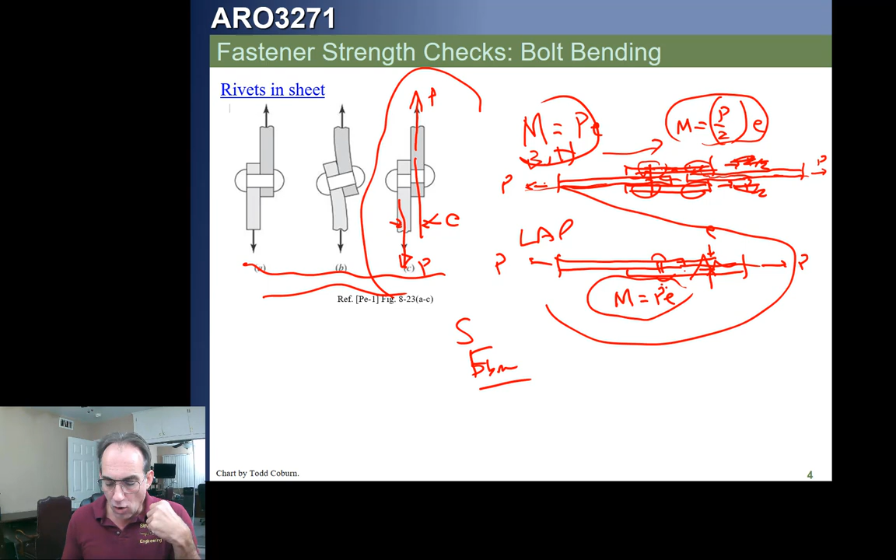Now normally if the sheet thicknesses are relatively thin, we ignore this. The reason we're able to get away with ignoring it is because if we test our joints using the same approach and ignore the moment when we test, then the shear and bearing allowables we develop already account for whatever small moment occurs. This means as long as our sheet thicknesses are in the range provided, you'll notice in your handbook, in the allowable section, that our bearing allowables have different values for different size sheets.

With different size sheets, the thicker the sheet is, it causes a slight change in material properties. But also, if those bearing allowables are from testing samples in those thicknesses, then the bearing values shown in our handbook already account for these small eccentricities. This is why we can ignore the moment that develops due to the eccentricity, because already the shear and bearing allowables in our handbook account for those.

Now the problem occurs if we start attaching thick parts together. If these are outside the ranges those bearing allowables were developed for, then that eccentricity may no longer be insignificant—it may not be reflected. Like when we have a big aluminum ring attaching to a thick composite sandwich with splice plates like this, we end up with eccentricities and secondary moments which may need to be addressed.

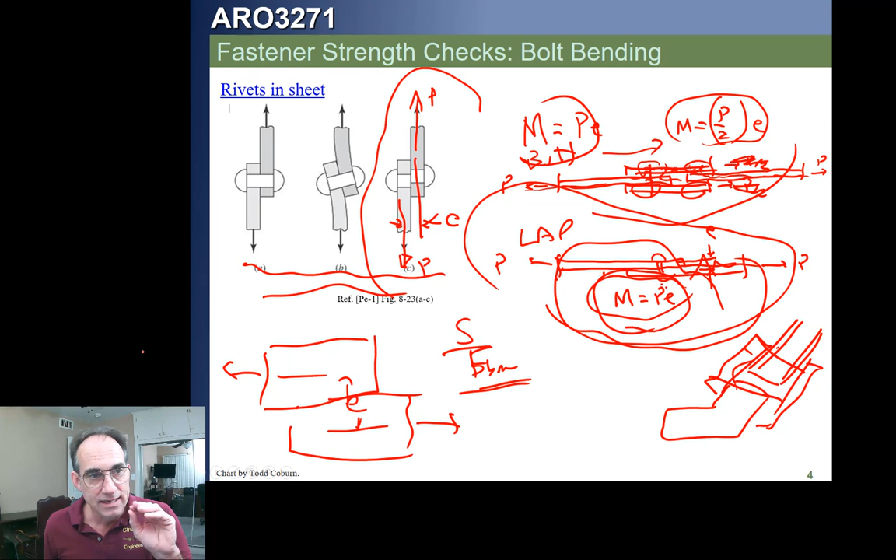So what we're going to do here—even though we typically will ignore bending moments in aerospace analysis, that really is only valid when the sheet thicknesses are relatively thin. If our thicknesses get thicker, like for many rocket parts or larger, beefier parts, then we actually need to be able to analyze the moment that occurs.

As soon as we start analyzing the moment that occurs, we get into some rather challenging detailed work, looking at prying effects on the head and things like this. We're not going to try and learn that in this undergraduate class. All we're going to focus on is analyzing what moment springs into being and how that's analyzed in this particular class. We're still going to ignore the moment unless we have a joint where we're asked to assess it, or it's obviously thick.

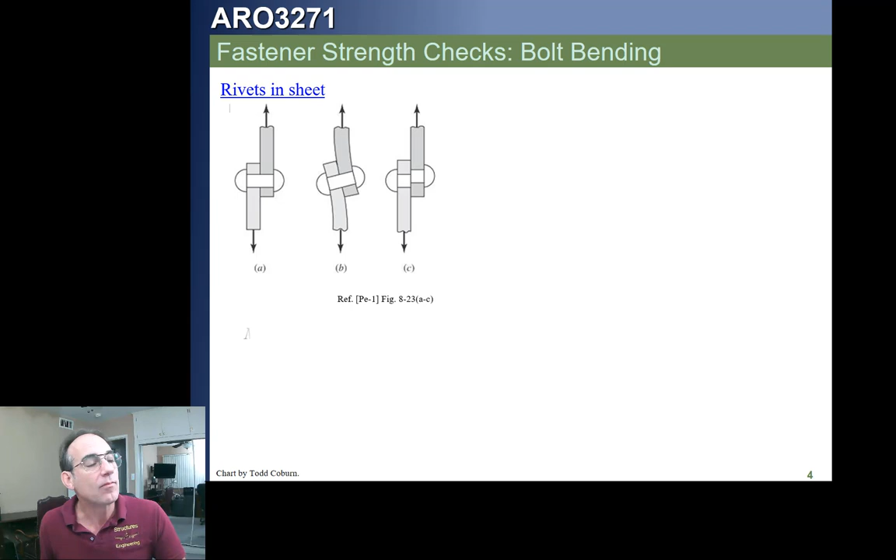So for a lap splice like this, you can see this eccentricity is going to just be half the thickness of each plate: T1 over 2 plus T2 over 2, which is given by this little equation here.

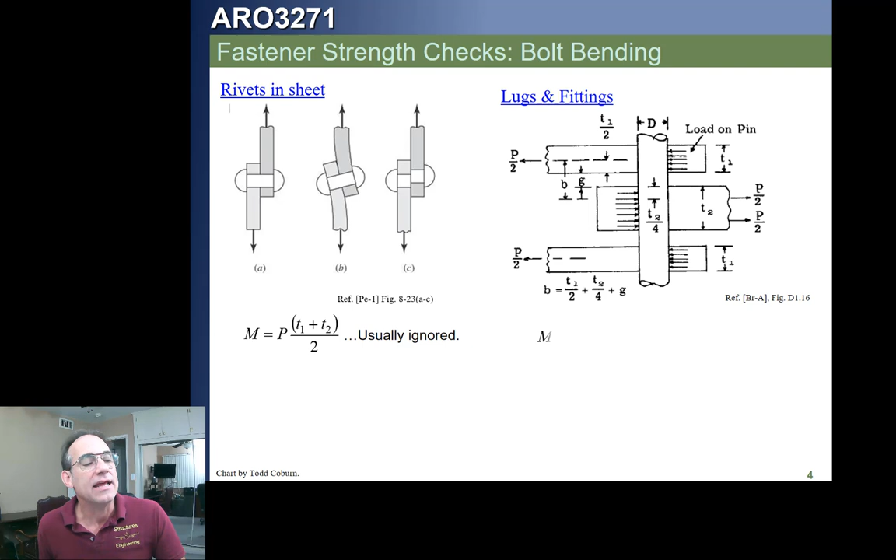If we have a lug, which is a special name for certain kinds of joints, you can see this is a double shear joint. We've got P here, shown as P over 2 for each half. Imagine this thing cut in half: if this is P, half goes up through this part and half goes down through this part. So Bruhn's picture shows we get half of that on each side. This first P over 2 is centered at the middle of this.

In this particular case, our eccentricity is half of this thickness, which is T1 over 2. And we've got half of this thickness, T2 over 2. Actually, this is half of the half, so this is T2 over 4. Then we have whatever gap exists, which adds to our total eccentricity. If we call the gap T over 4, plus the gap, plus T over 2 — and look at this, T1 is this little skinny guy, and this guy down here is T2.

Let me do that again. Let's say we have a joint like this, a thick joint, with a gap. First we imagine the gap all occurs at one side. If this is P, then this is P over 2, and this is P over 2. Now we've got this gap here. Let's draw this bigger: we've got this little piece, this piece, and this piece down here. We've cheated with this gap all the way over to one side.

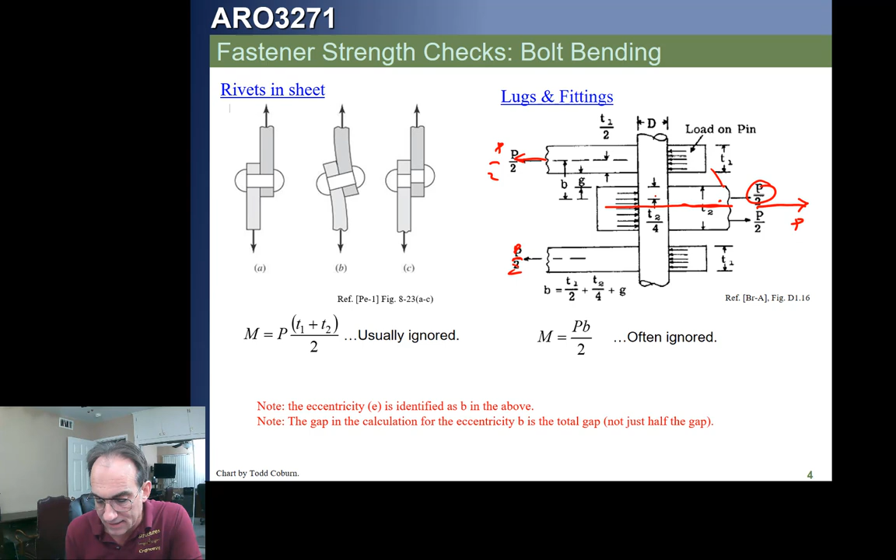Let's look at it again. Let's say we've got a force here, P, transferring to right here, P over 2, and right here, P over 2. Imagine half of this force goes this way, basically centered on one half. This is one half of this thickness, and it's centered at 1/4 of the thickness, so this dimension here is T2 over 4. Then we've got the gap, and this dimension here, which is T1 over 2. This gives us this equation for the total eccentricity.

We're using E rather than B for eccentricity. Our moment then is the force that's transferring this way, which in our case is P over 2, multiplied by the eccentricity. This gives us the total moment in that joint.

Now, going the other way down to this one, since we cheated all the gap to one side, there's no gap down here. So the eccentricity there below is just going to be T1 over 2 plus T2 over 4. There's no gap there. That moment will be P over 2 times that E below. It's less, therefore we generally won't even check it.

We're only going to imagine all the gap is on one side and check that spot. Once we have that moment, we can check the plate for that moment, or more specifically, we can just imagine that the fastener is carrying a pure moment, and that's a gross simplification, but then we'll just take the cross-sectional area of the bolt shank, and we will analyze it for the bending MC over I, where we have the M using that moment and the I of that bolt and the radius of the bolt, or D over 2 of the bolt. See how that works?

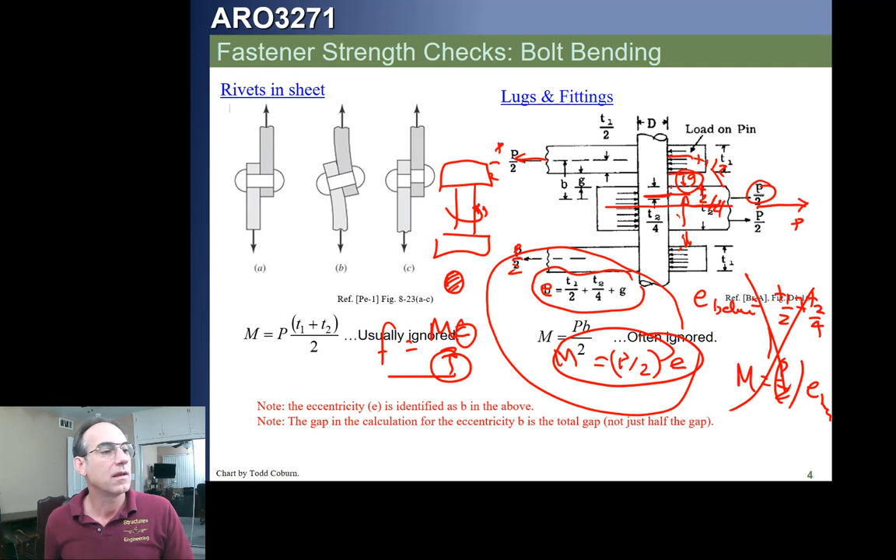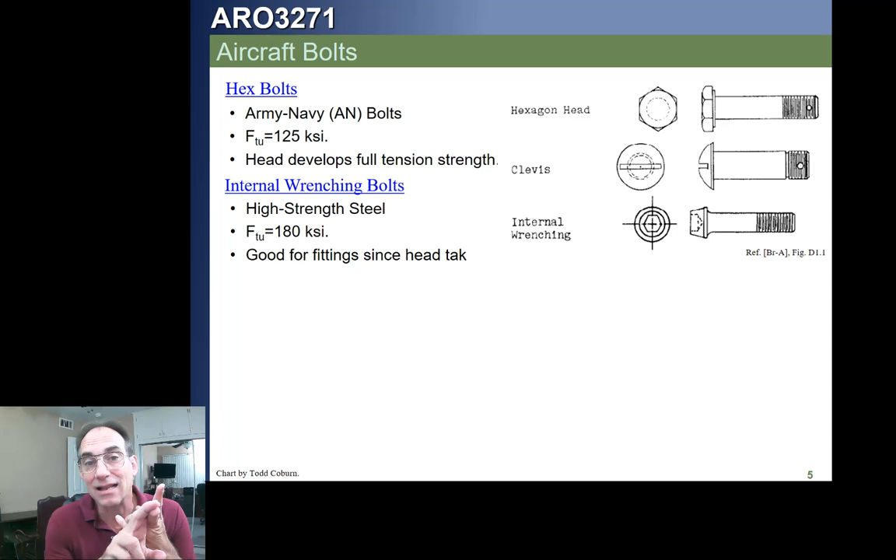Now, next we'll look at some aerospace standards. So for bolts in aerospace, we're going to be seeing a lot of rivets. We're going to use a good amount of Hi-Loks and lock bolts, and then we're going to use some threaded fasteners. Threaded fasteners, we have to take extra care that they don't come unthreaded in flight. There's 3 major standards that we're going to analyze for threaded bolts, and then we're going to look at how to combine loading on aerospace bolts.

And the combination of loading for the threaded fasteners used in aerospace will be the same as we will use for non-aerospace fasteners. So last time we looked at aerospace and non-aerospace standards, but today's study on how to interact our loads on the bolt to calculate the net effect for the margin of safety is going to use the same approach as what we're going to look at here.

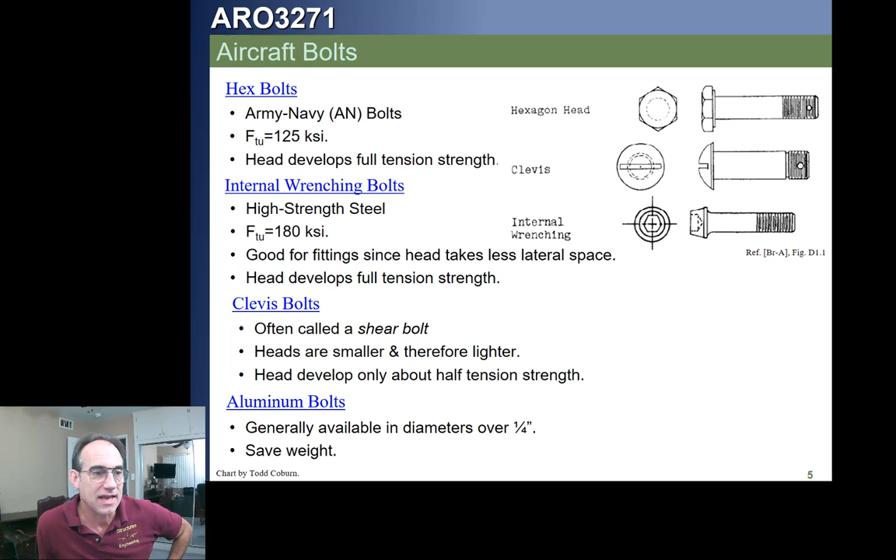So there are various bolts. We're going to basically break our bolts into a few major classifications. Let's take a look at that on the next slide.

Okay, the first kind of bolt we're going to look at is an Army-Navy steel bolt, an AN steel bolt. This table here gives us the allowable based on the diameter. Now, based on these nominal diameters, you can calculate the shank area, but it's provided here for you if you want to use that. Then we see 3 allowables. Notice these are not stress allowables like we normally see. These are force and moment allowables. We need to be a little bit careful because often when we're talking about bolts, sometimes we'll talk stresses, often we'll talk forces.

So these are the allowable forces, or the ultimate allowables. S sub U is the ultimate shear allowable, that's how much shear force the bolt can take. P sub U is the tension allowable, that's how much tension force the bolt can take. And the moment, M sub U, is the max moment it can take.

For example, let's say that we have a 1/4 inch bolt. If we have a 1/4 inch bolt loaded in tension, we look and see we got a 1/4 inch bolt, we know that our allowable is this. If we have a tension load of 2,000 pounds, we can write the margin of safety directly. If instead we have a 7/16 bolt loaded in shear, let's say 8,000 pounds of shear, we can just write the margin of safety based on that allowable.

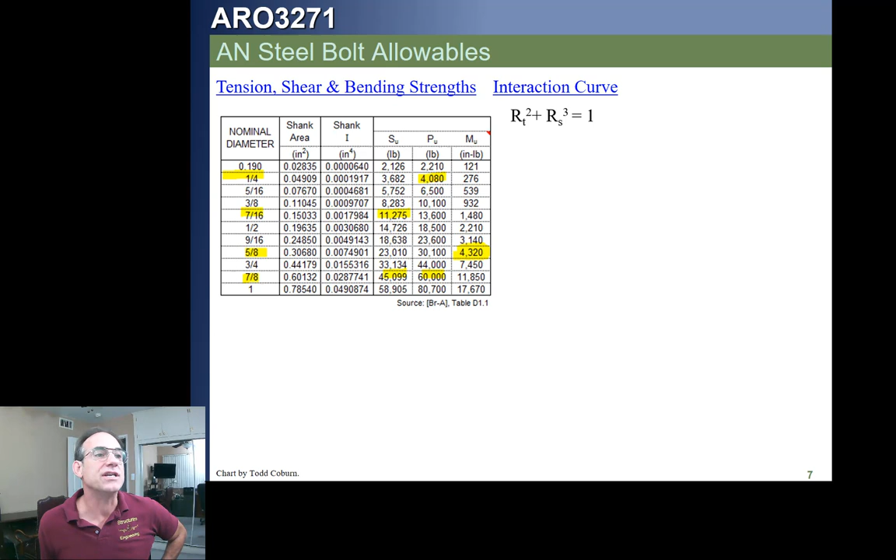If instead we have a bolt that has shear and tension, these are the two allowables, we then are going to have to use this interaction equation. Since we have shear and tension, we're going to have to write the stress ratio for both.

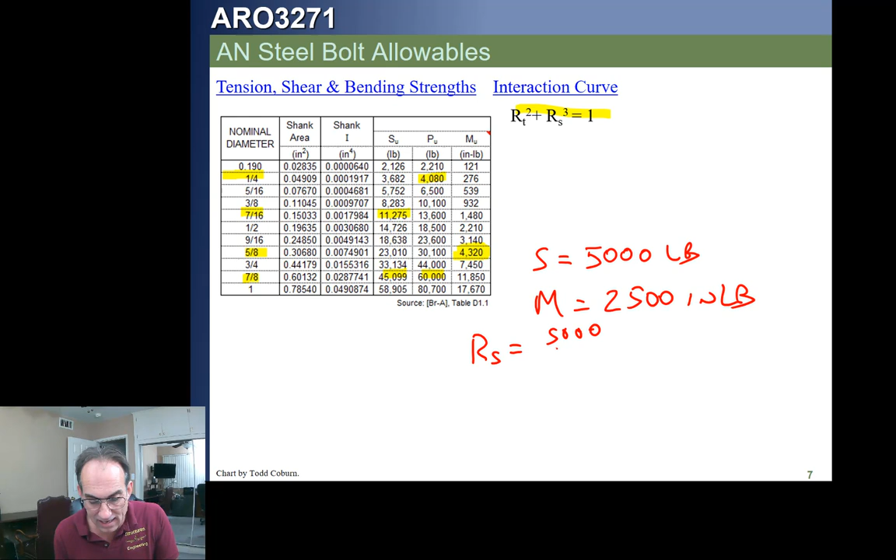Let's say that on this 7/8 bolt, the shear force is 5,000 pounds, and the moment is 2,500 inch-pounds. Our stress ratio for shear is just going to be 5,000 divided by the allowable 45,099. The stress ratio for tension, or excuse me, the moment affects our tension stress, so that is going to be our moment, 2,500 over 11,850.

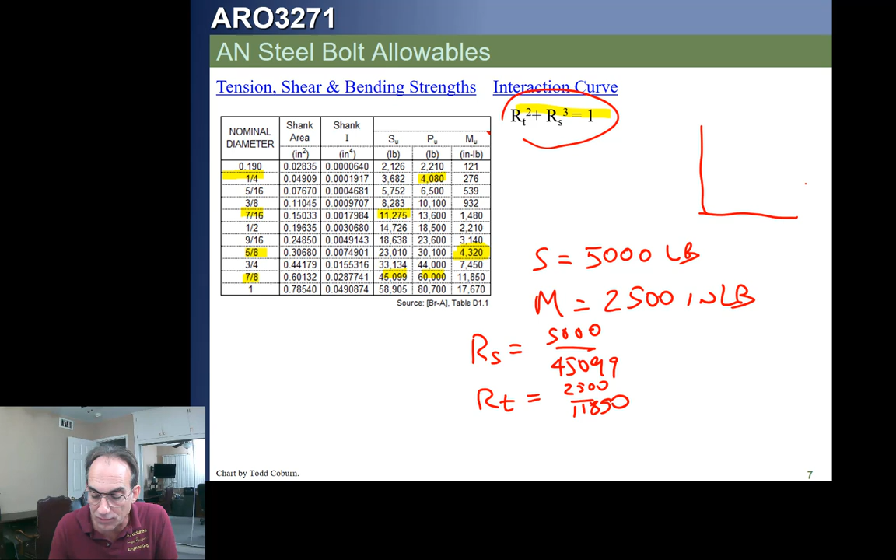In that case, we now have to apply this interaction equation. Now, we don't have a closed form equation, so we're going to have to go to the interaction curve for threaded fasteners, which looks something like this. We'll look at that on the next slide. This is going to have RS down here and RT down here. We're going to plot our point, draw a line, and write the margin of safety as we learned to do in ARO3261.

Let's say instead that we have a 1-inch bolt. Let's say that 1-inch bolt has an axial force of 30 kips, a shear force of 20 kips, and a moment of 5,000 inch-pounds. We're going to first write our stress ratio for tension.

Now remember, tension stress is P over A plus MC over I, right? So actually we can write that tension stress ratio as the ratio of both. So we've got the axial one, 30K over, that was axial, so our allowable is 80.700, plus we've got the moment one, which was 5K divided by 17.670 inch kips. That's our total stress ratio for tension.

Then we get our stress ratio for shear, which we said we have 20 kips, and our allowable is 58.905 kips. Now we've got our two stress ratios. The tension stress ratio combines axial and moment. The shear stress ratio is just the shear. We're going to take those two stress ratios, plot them on our curve, and write our margin of safety. The interaction curve is on the next slide, or in a moment we'll take a look at that, okay? That's how we do that.

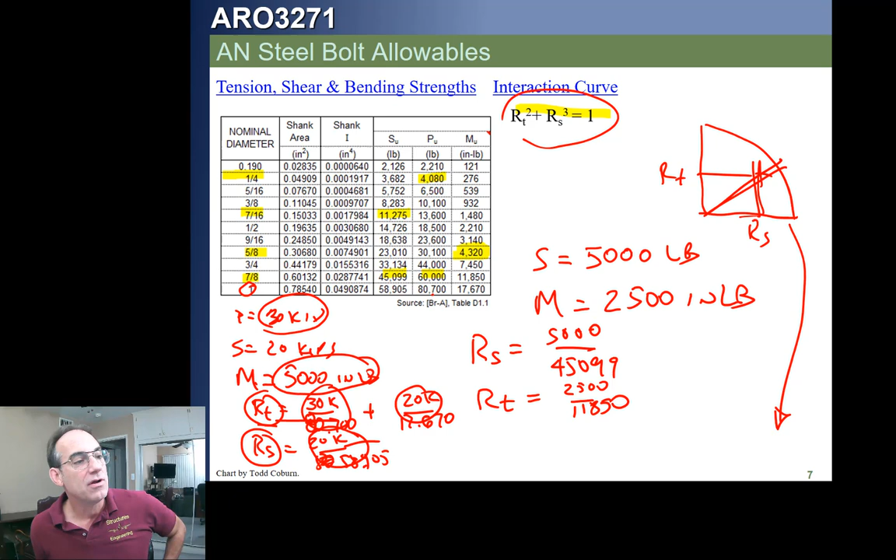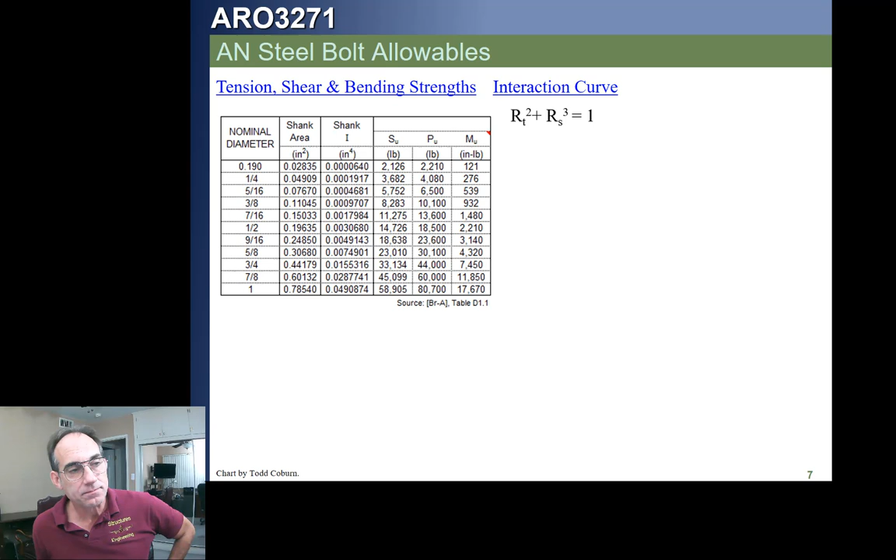If we ever have a combination, if we have axial and moment, we can once again just add those two stress ratios and write the margin of safety directly. But if we have shear with either axial or moment or both, then we're going to have to write both stress ratios and use the interaction curve. And the same approach will be used for all threaded fasteners. The difference is that we will have different allowables. Okay, so this is how we combine them.

This first equation is showing if we just have tension and shear, we can combine like this. If we have tension and bending, you just add those together, write the equation like this. We don't actually need to write the equation. All we're going to do is calculate our stress ratios.

Once we have the stress ratios, we'll take the shear stress ratio on this axis, plot it against the tension stress ratio or the normal stress ratio. We're going to draw a line from the origin through that point and then write the margin of safety as we learned to do in ARO3261. Got that? If you don't remember how to do that, pull up your ARO3261 handbook and review.

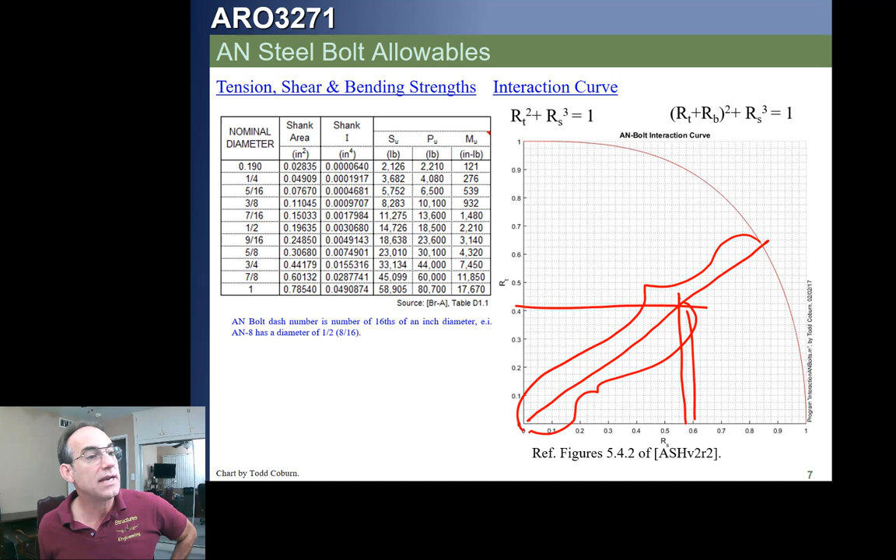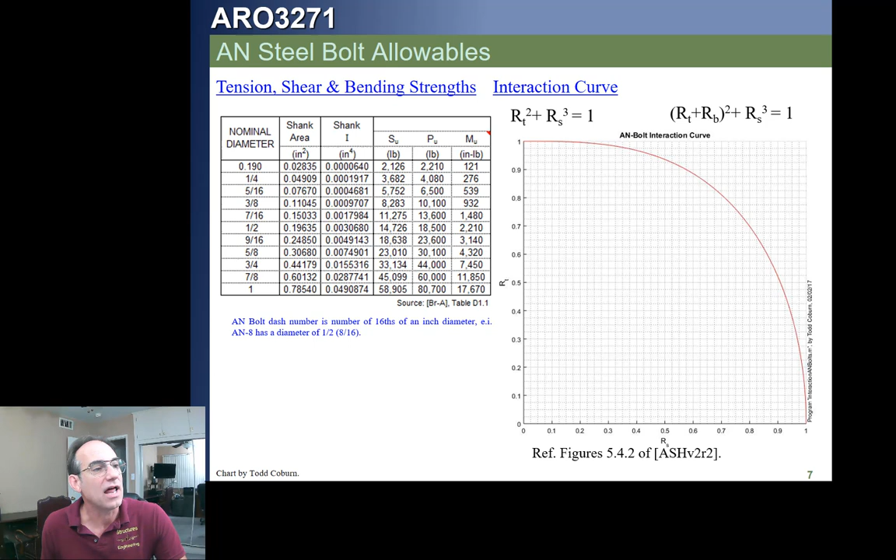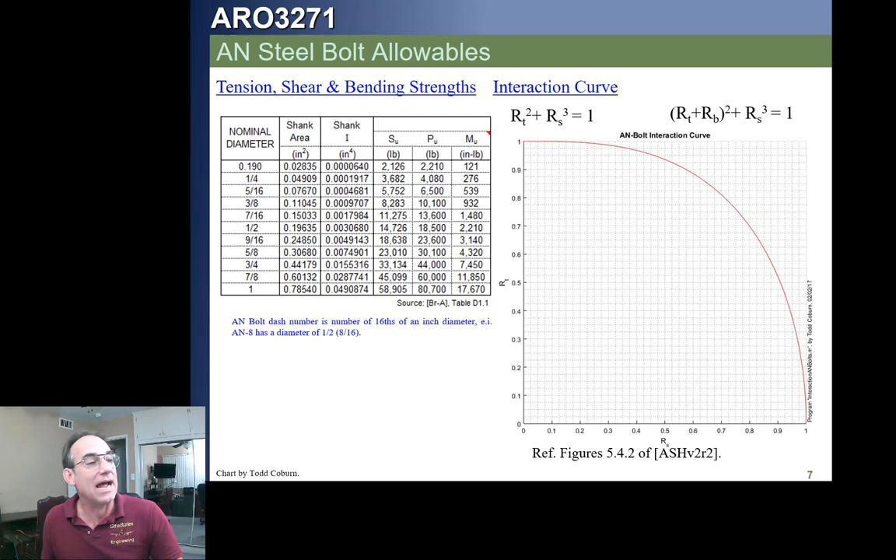Okay, one more deal. These AN bolts, a lot of times they're called out as a dash number, like AN 8 and such. That 8 or whatever is the number of sixteenths. So 8/16 would be a half-inch bolt and so on. So Bruhn has some, calls these out with using their dash numbers. Sometimes I will do the same thing. If that happens, that's how you convert that.

All right, the next kind of bolt is an internal wrenching bolt, a steel internal wrenching bolt. Steel internal wrenching bolts have the same interaction curve as we saw.

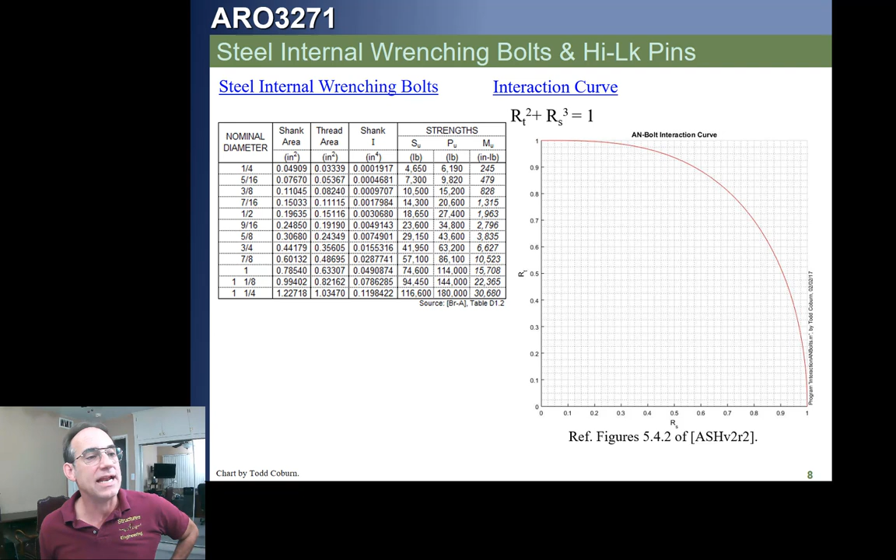In fact, all threaded fasteners have the same interaction curve. It says here it's an AN bolt interaction curve, but really it's for all threaded fasteners. You can see from our table here that we have a shear, moment, and axial load allowable. We're going to handle these the exact same way.

If we have a 2024 aluminum bolt, we have the same threaded fastener interaction curve, but you'll notice we have different allowables. Now what this is providing is not stress, this is again force allowables. For a 35 KSI shear bolt, 62 KSI axial stress, these are the force allowables. So this is the shear allowable in pounds, the axial allowable in pounds, and the bending allowable in inch pounds for those, okay?

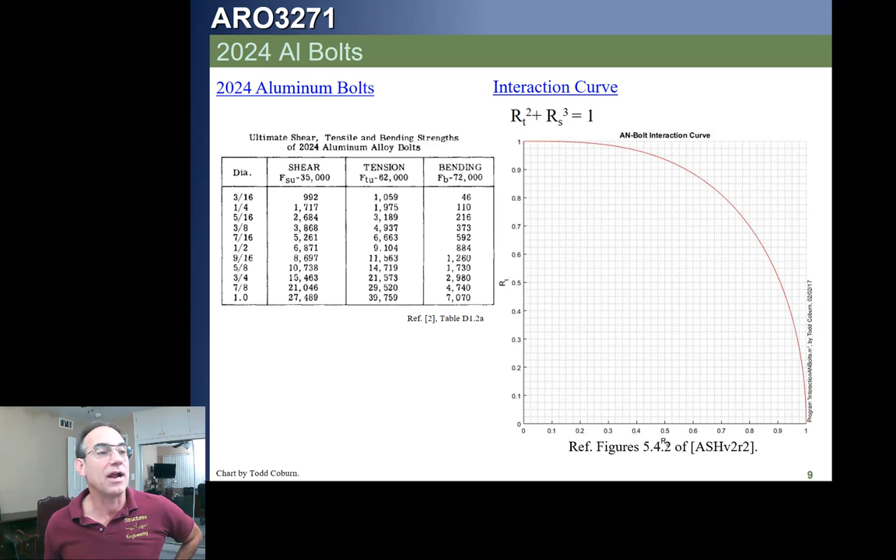And we're going to use the same interaction curve. So that is how we handle threaded fasteners. If we have a non-aerospace bolt, we will take the allowables from last lecture, write stress ratios in the same way, and use the same threaded fastener interaction equation to combine those stresses, okay?

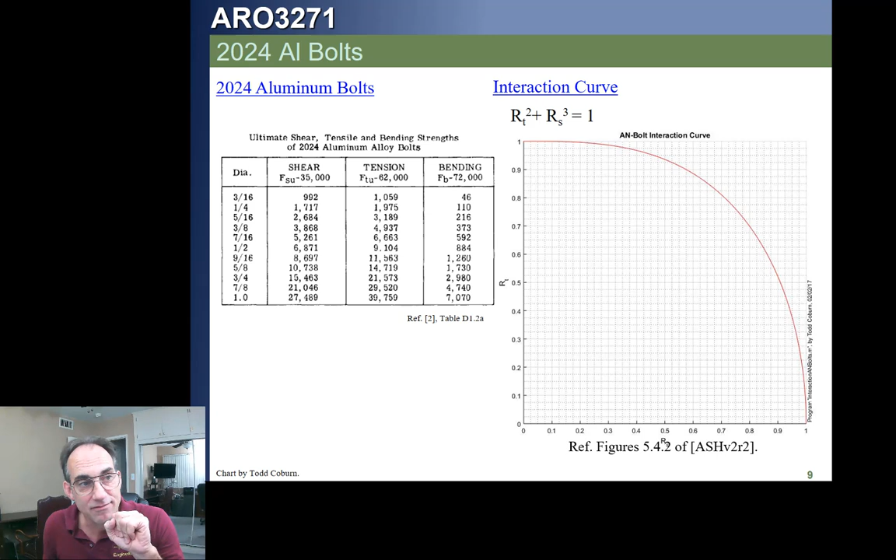Next, we're going to look at a different kind of fastener. These are lock bolts. Lock bolts are very commonly used in aerospace. They're permanent fasteners - basically a fastener that's designed to be put in place, and when you apply the collar, it breaks off the back end, so you have a permanent collar on it. In order to remove these, you have to drill them out. It's a big hassle, but they're done a lot.

I've got a number of links in the PowerPoint. I'm going to encourage you to pull up those links and watch these videos. It really helps to understand the way these lock bolts work.

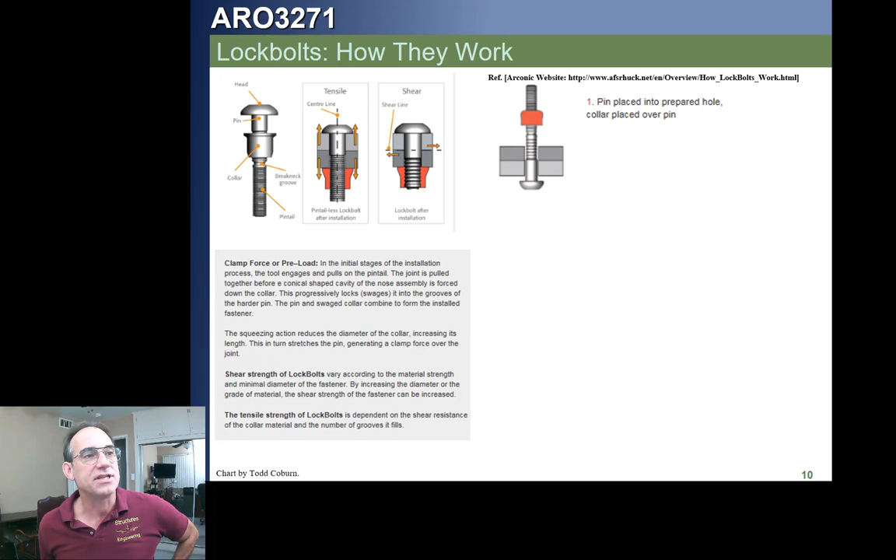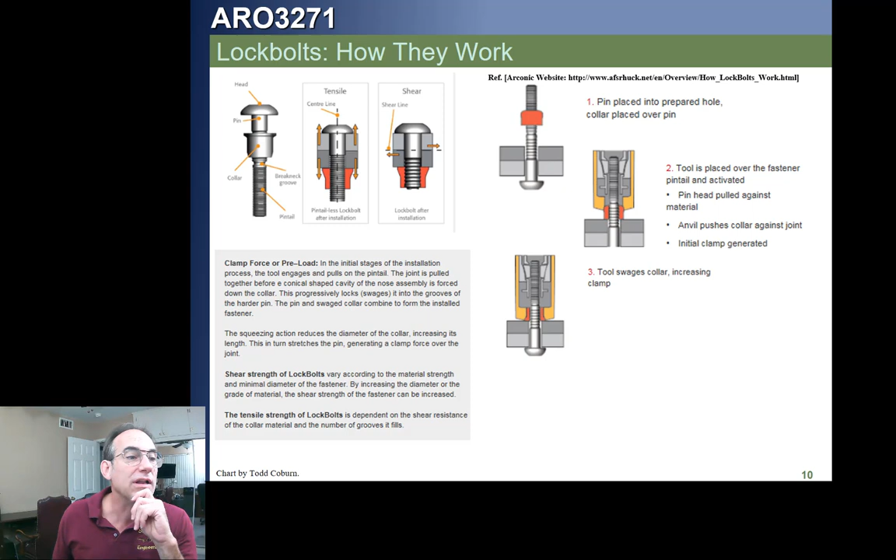This is a synopsis: you put the fastener in, you put the collar on, you then apply a tool which presses that collar on. As it does, it squeezes the collar down onto the threads. If the threads are like this, it squeezes the collar until it deforms the material into the threads. The videos show this really well, and until it breaks off.

This video right here, these two videos I recommend watching. Watch it, then stop it and go slowly through as you see how that tool presses the material, takes the material and deforms it and jams it down into the grooves of the pin. That's how these things work.

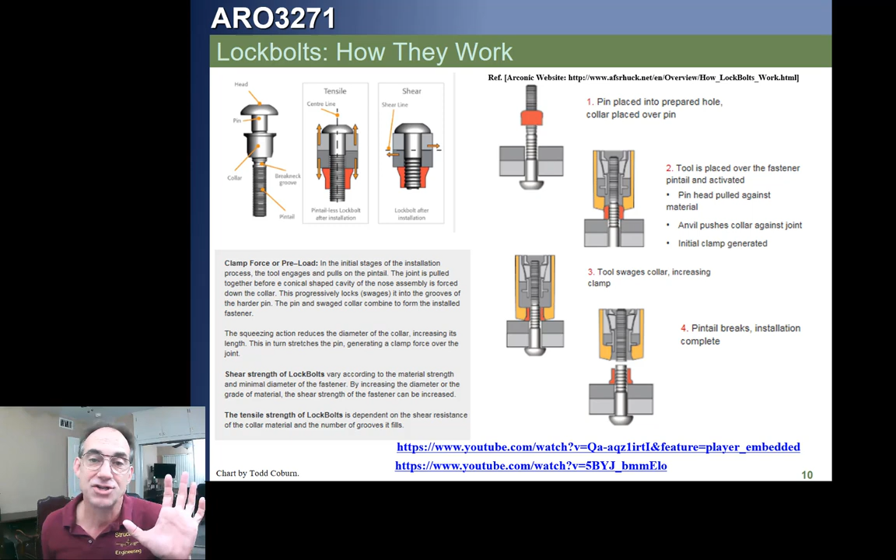Now, that's just to help you understanding. What we're going to do is analyze these. So what we need are the allowables. These are the allowables here.

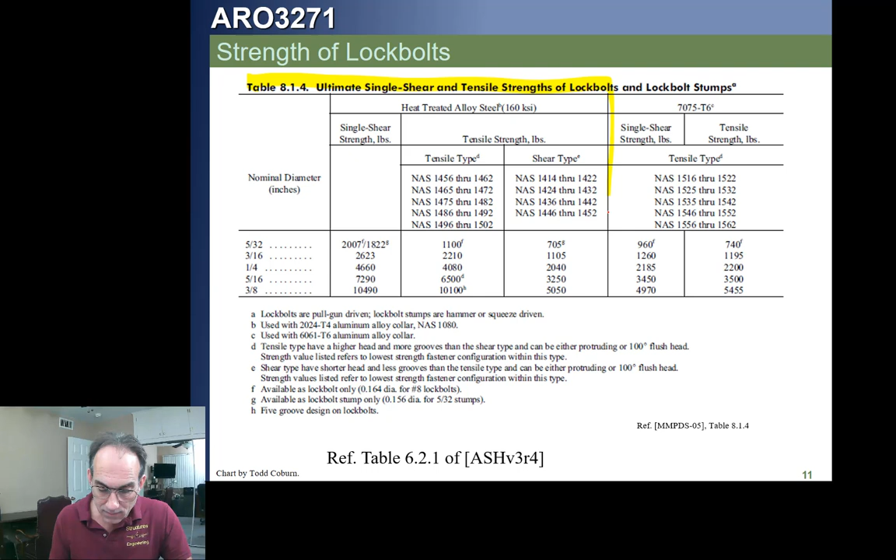Now, this little table is a little confusing unless you pay attention, and I have found that students often don't pay that much attention, so that means it might hamstring you also. This is really kind of two tables. We have this table - this is for steel fasteners, right? And we have another table, which is this one, which also has this part, okay?

So the first one is for steel. If we have a steel fastener, we're going to go to this first part of the table. If we have an aluminum fastener, we go to the second part.

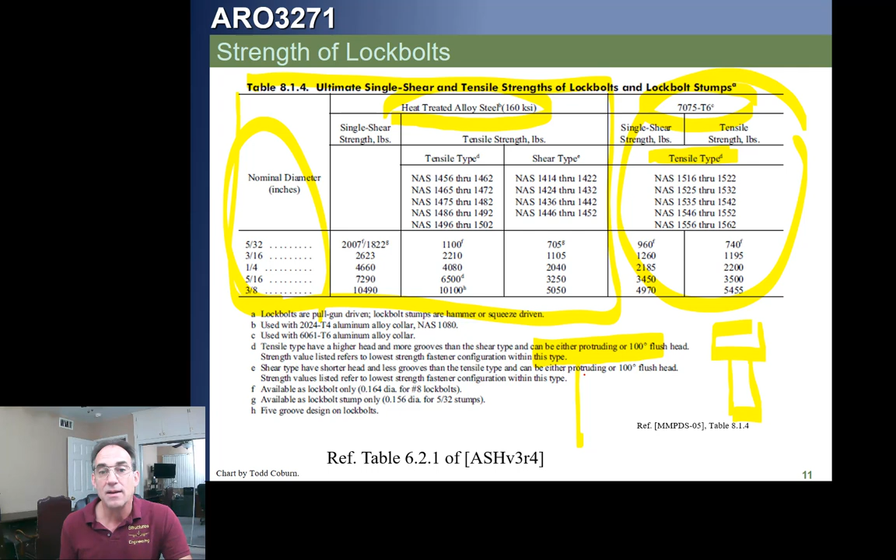Now, the easiest one is aluminum. You'll notice we only have aluminum allowables for tension style heads. Now, what happens is, if a fastener is designed for tension, it tends to have a deeper head. If it's designed for shear, it may have a really thin flat head. The thin flat head holds that fastener in place, but it doesn't give as much strength. That head can break off like we saw with the button back in 3261. So we need to be alert for tension and shear type fasteners.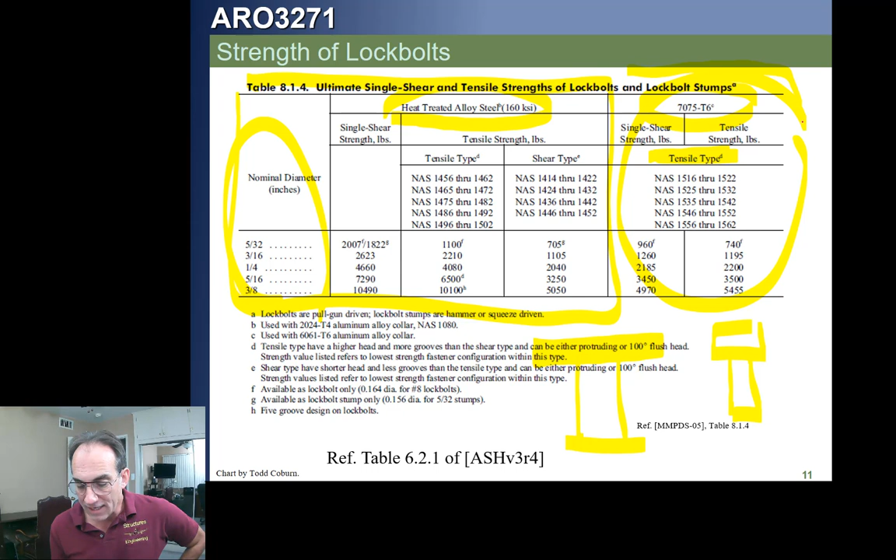Now you'll notice in this table for aluminum fasteners, lock bolts, all we have is a tension style head. So we're going to assume that any aluminum fastener has these allowables. You'll notice this first column is the shear allowable, and this second column is a tension allowable, okay?

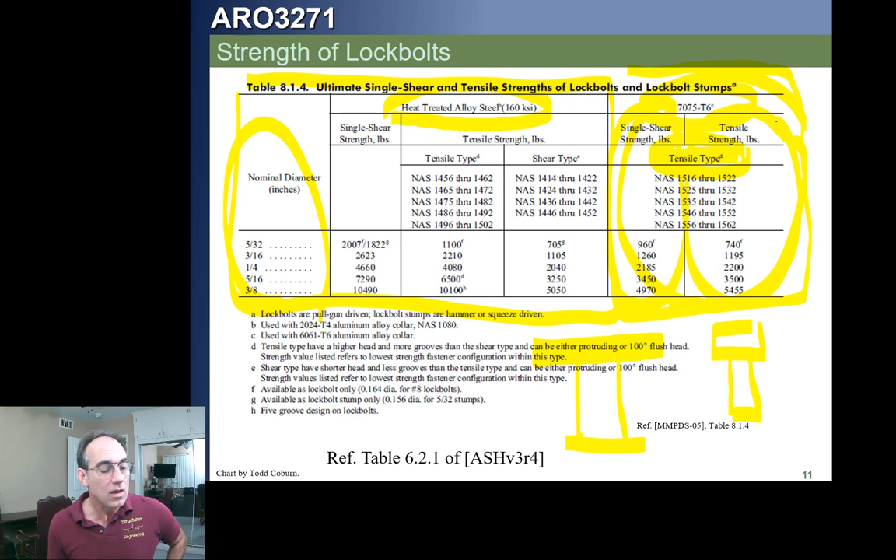Now, when we get to steel fasteners, we're going to use this other part of the table. Let me erase everything and start that over. We're using this part now. So we're going to say, oh, we have a steel fastener.

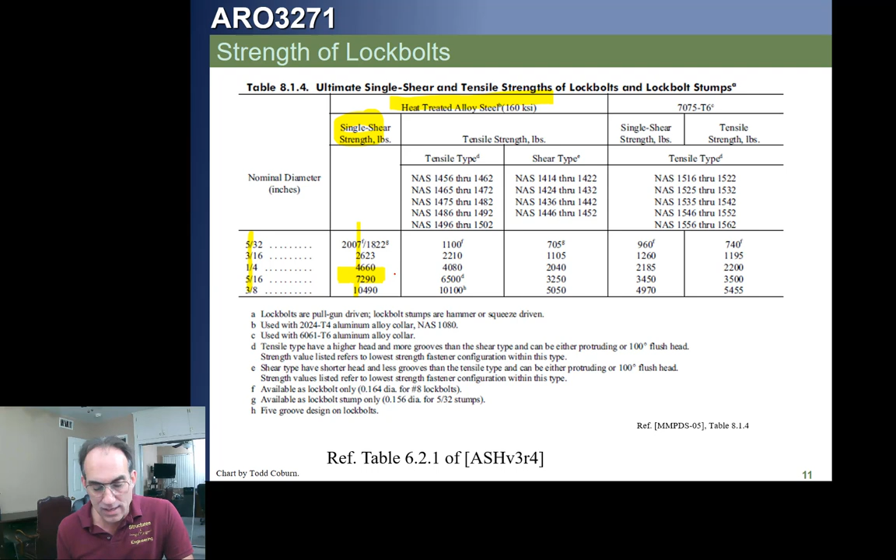That means we're over here, and that means we're going to take our diameter, and then we're going to be looking for an allowable. We're going to say, okay, if we need the shear strength, we're going to use this column. So a 5/16 fastener has a 7290 pound shear strength.

That same fastener, if we're looking for the tension strength, we're going to have to first determine, is it a tensile style head or a shear style head?

Once again, the head means that a shear head tends to be very flat, like this. If this bolt is in shear, you don't have to worry about this. But if it's in tension, you're going to tend to bend the head like this if it's very thin. A tension style head will tend to be thicker, so if it gets axial load, it has more shear and moment capability so that it can develop the full strength of the fastener.

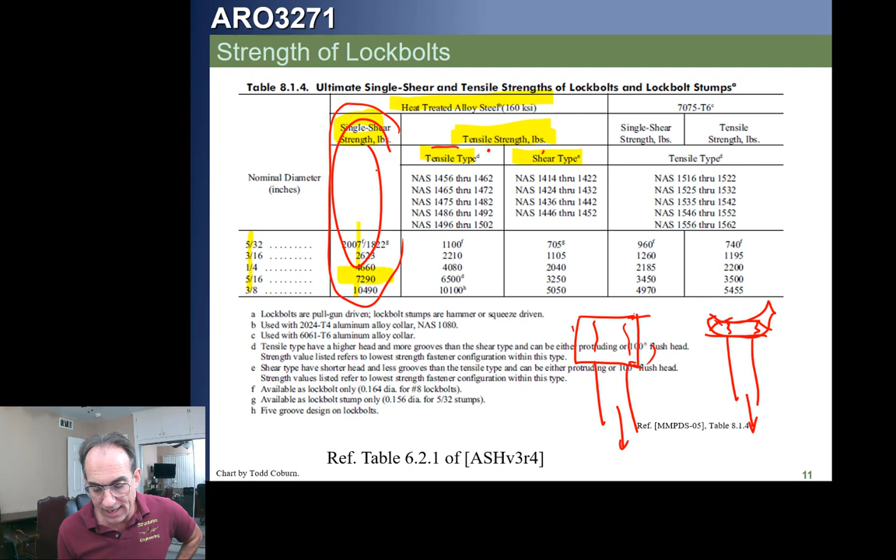So for steel fasteners, first we have to figure out the shear allowable, which will always be from this column over here. The tension allowable will be one of these two columns. You've got to say, do we have a tension style head or a shear style head? If it's a tension style head, this is our allowables. If it's a shear style head, these are our allowables, okay?

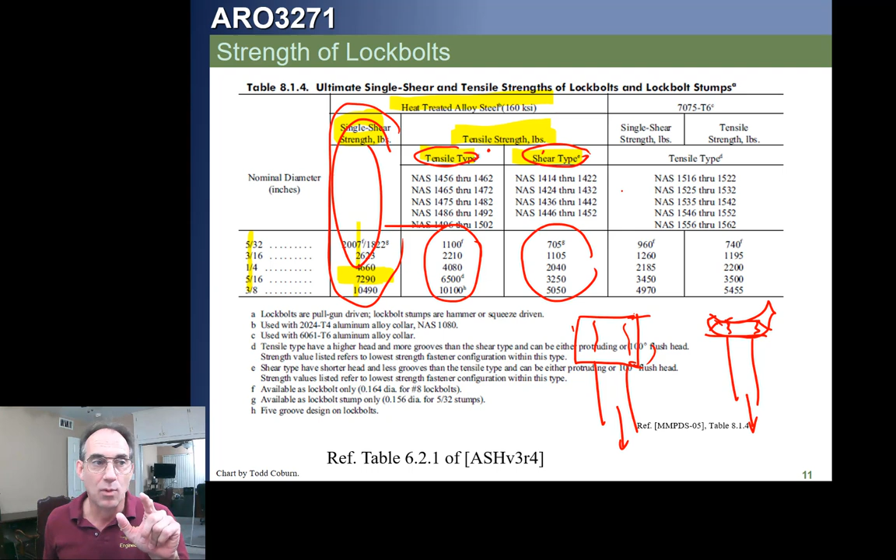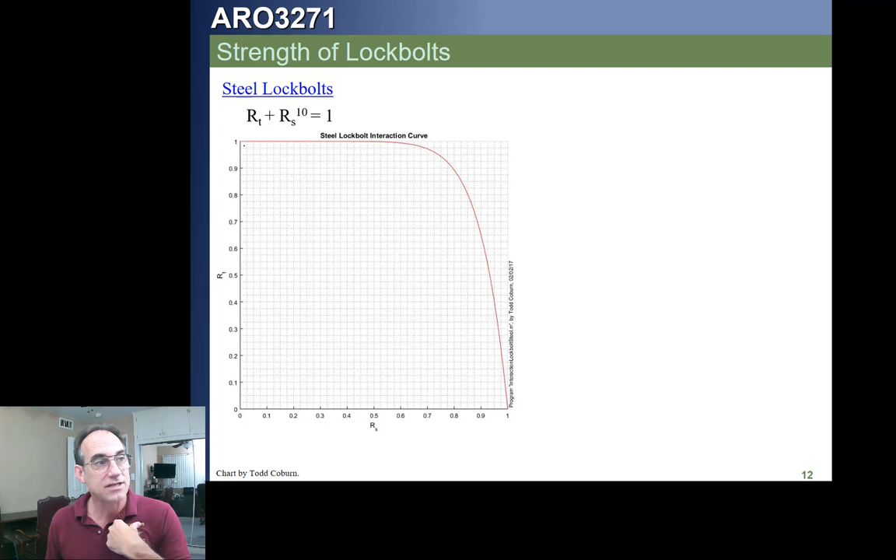That's important. Now, once we have understood that, we have a shear and a tension allowable. If a fastener takes both shear and tension, then we're going to use this interaction equation, which means we need this curve, which means we're going to write our stress ratios for the axial load and for the shear, and then we will plot our point and write our margin of safety using this interaction curve.

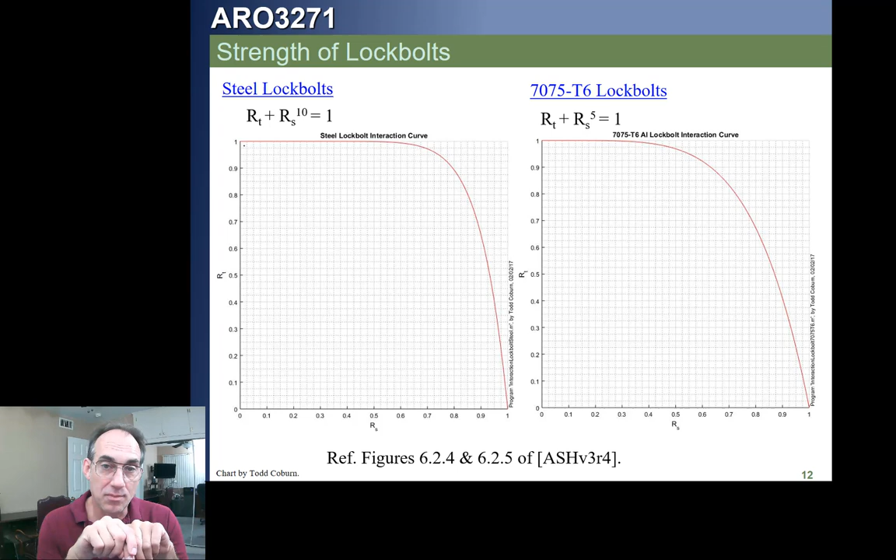If we have an aluminum lock bolt, then we need to use this interaction curve because it has a different interaction equation. So for threaded fasteners, we're going to use the interaction curve from the prior slides. If we have a lock bolt, we're going to use one of these two interaction curves with the allowables from the prior slide. Got it? That's how we're going to do that.

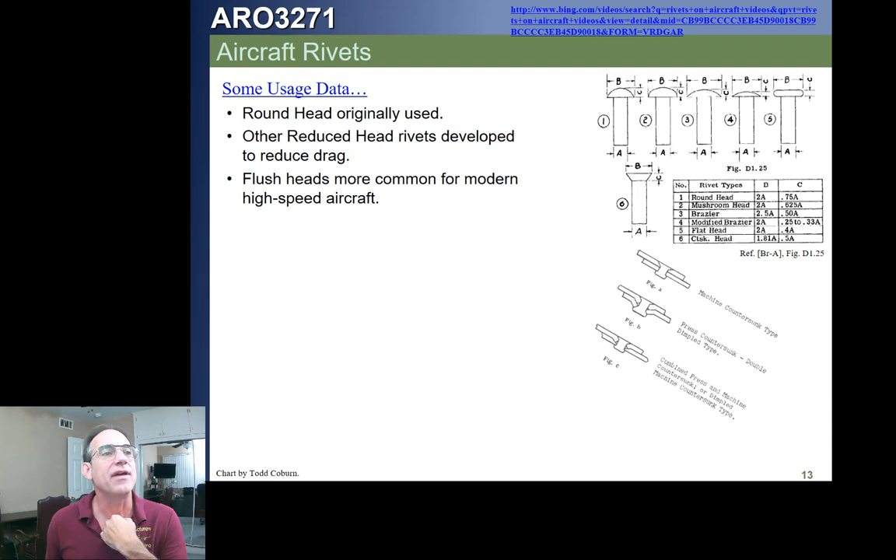We're going to be looking at three kinds of rivets: protruding head rivets when the head sticks out, and flush head rivets. With flush head rivets, we're going to have two types. One is called machine-countersunk, which means somebody came along and said, all right, we've got two sheets of material and we're going to fasten them together. First, they will drill the material like this, and then they will install a flush head fastener like that. That's called machine-countersunk because they machined this cut.

That develops one set of allowables. If we have a fastener that has a head that sticks out of the joint, like this one, that's called a protruding head. This is our first type. This is our second type.

The other type is dimpled, which is used when our sheets are really thin, so they're too thin to machine. What they will do is dimple it, which basically means they'll take that flush head rivet and use a tool on the sheet. We've got two sheets attached together here. They drill a hole through it, and then they apply a tool which bends the sheet into this form.

Sometimes they do this as they're installing the rivet. Then what they do is they apply this rivet, this flush head rivet. So now the rivet ends up—they didn't make the sheet thinner at all. It's just deformed at the place where it's joined.

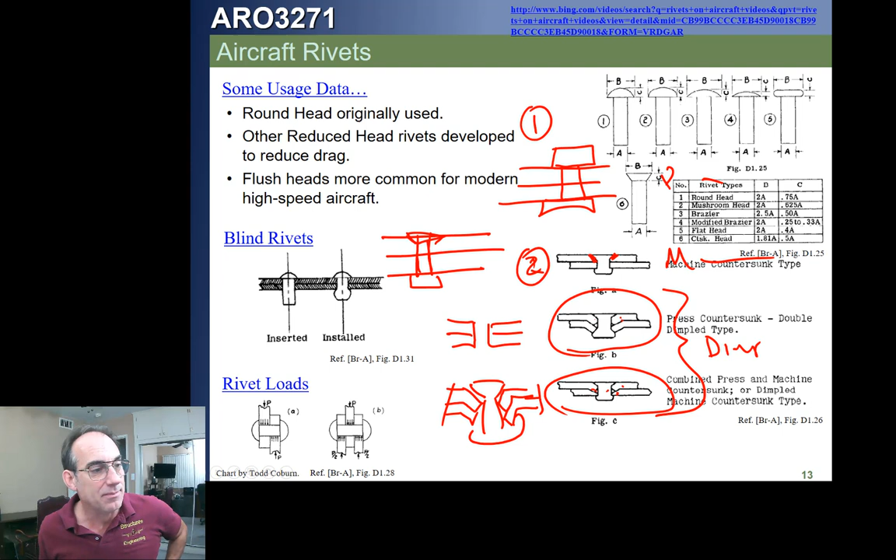So we're going to get three different sets of allowables for rivets. It's going to be important that you can carefully navigate through that and get the right allowable using the approach. It's going to feel kind of convoluted for you, but this is the way it's often done in industry.

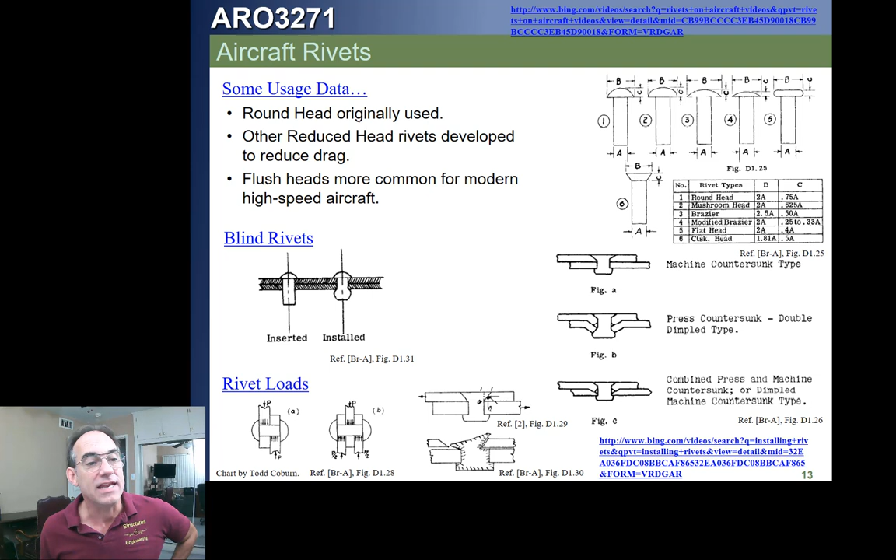If we have a protruding head rivet, we're going to have a detailed approach to get the allowable. We're going to need a shear allowable, a bearing allowable, and a tension allowable a lot of times.

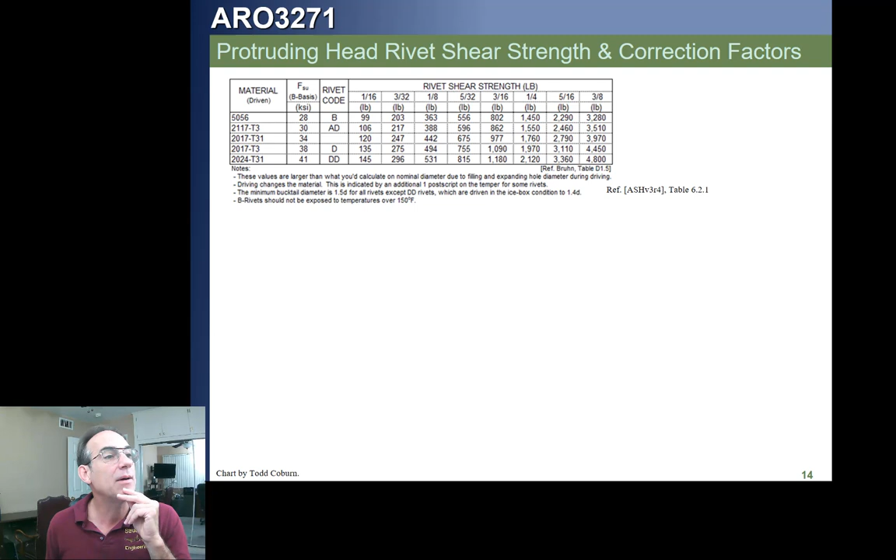For the shear allowable, we're going to start by getting a pristine, perfect allowable. We'll come to this table, look for the material of our rivet in the leftmost column, and then come over and look at the rivet size. Let's say our rivet material is 2017-T3.

Now watch out, some of these look almost identical. 2117 looks just like 2017, and 2017-T3 looks kind of like 2017-T31, so don't get fooled.

So we're going to go here, next to the rivet diameter. Let's say we have a 3/16 fastener, so for a 2017-T3 rivet that's 3/16 diameter, our S sub B prime, our perfect allowable — we could call this our shear allowable prime, because it's the uncorrected value — is 1090 pounds.

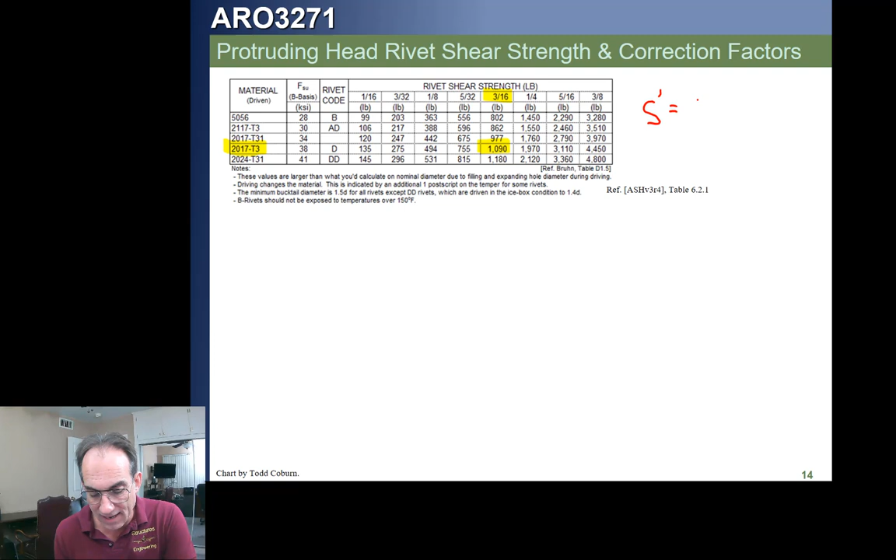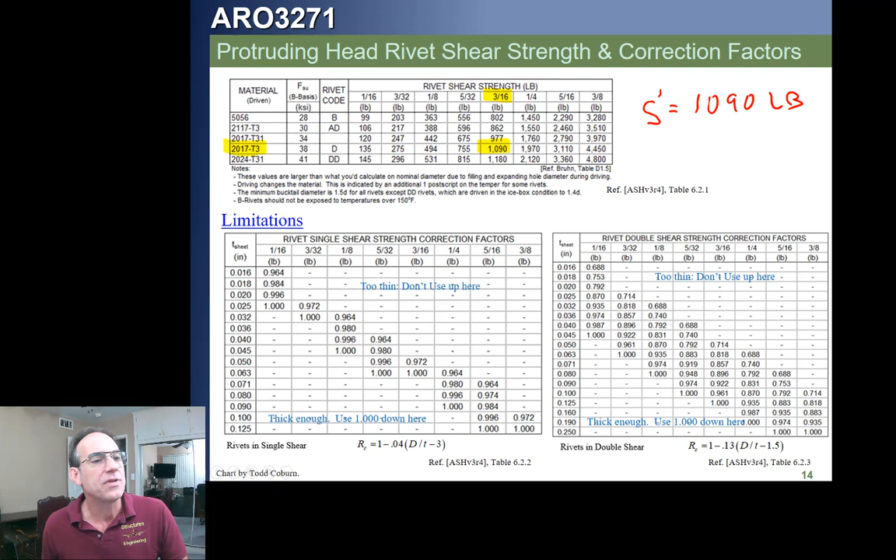Now that's not the final value, we're actually going to have to tweak that. The Mil Handbook says we're supposed to tweak this number using these two charts, but what I'd like you to do is not use these tables at all. We're going to use this equation instead.

So first we're going to get S sub B prime, and then we're going to calculate S equals R sub C times S sub B prime, and that's going to be our shear allowable — our ultimate shear allowable.

Basically we're going to take the diameter to thickness ratio in this equation. If we have single shear, we use this equation. If we have double shear, we use this other equation.

So to get our rivet allowables, we're first going to come here to get S prime. We're then going to use either the single shear or double shear ratio, R sub C, to correct that value, which will give us the shear allowable for our fasteners. That's our approach for rivets.

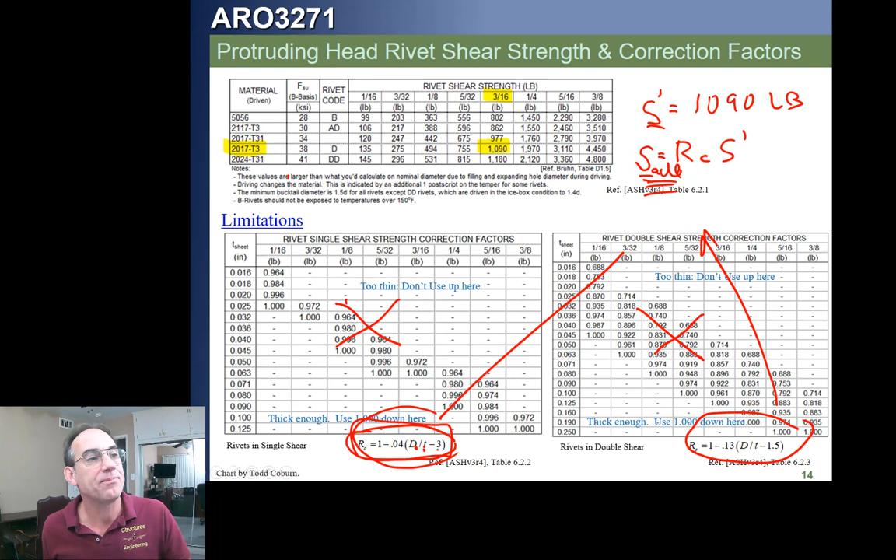Now that only gives us the shear allowable. We then need to get the bearing allowable, and we're going to have kind of a convoluted approach for that too. Let's look at that on the next slide.

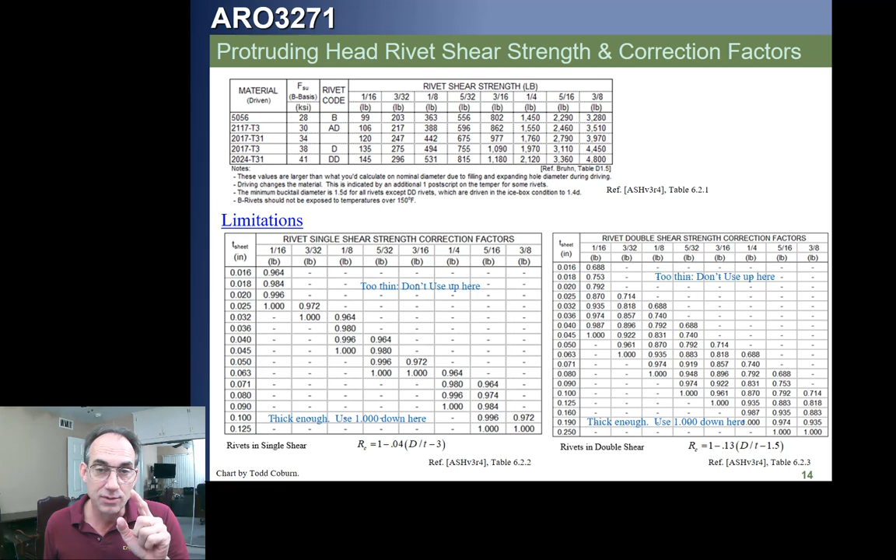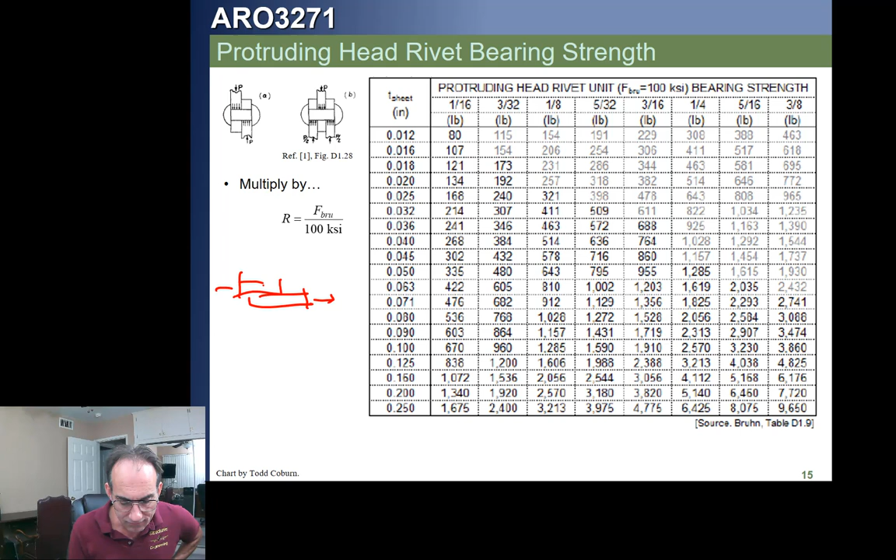Let me do this a little more. Let's say we have a joint like this, and it's loaded with a force P. Let's say this force is 500 pounds.

What we're going to do is first go and get our S prime for shear. We're going to take that S prime and calculate our R sub C. We're then going to multiply those together to get our S allowable for shear.

We're then going to go look at bearing. We're going to get our S prime, which is just the value from this table, and then get our R, which is this ratio. We multiply those together to get our S allowable for bearing. This was the allowable for shear, this is the allowable for bearing — whichever one is smaller is what controls.

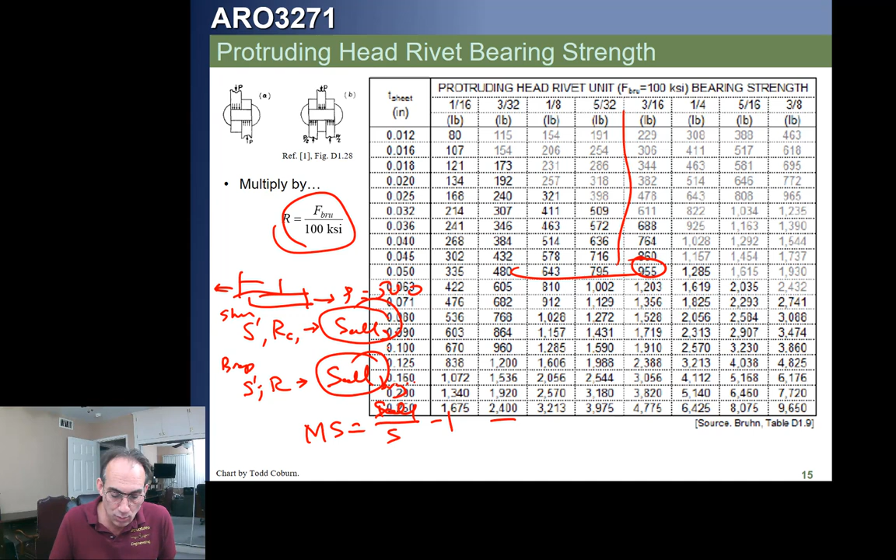So our margin of safety is going to be S allowable, whichever is smaller, over our applied shear, minus 1. If I ask you for the margin of safety for bearing, you'll use this allowable to calculate the margin of safety. If I ask you for the margin of safety for shear, you'll use this allowable against the applied shear. If I ask for the critical margin of safety, you'll check both and report whichever margin of safety is smallest. Now this is how we handle fasteners.

Now you've got to be careful, because this is all valid if there's no tension on the rivet, which is generally the case. If there is tension, we have to take one more step and use an interaction equation to combine tension and shear.

So if we have only shear, we need to check two allowables and report the margin of safety on the minimum value. If we have only tension, you can use an approach I'm going to give you in a minute. If we have both, we'll have to use an interaction equation. I'm going to talk about that next.

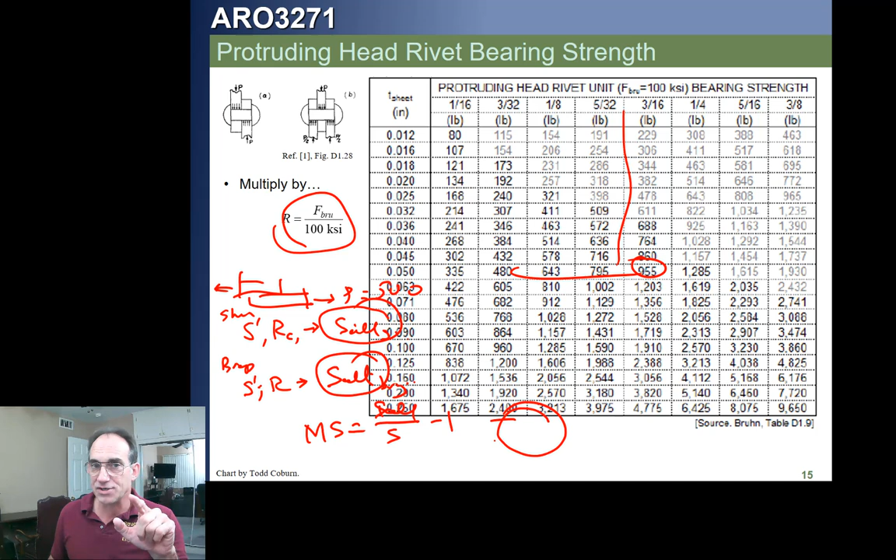Before we talk about tension, if we have a machine countersunk rivet, you don't need to overwrite this table because your book has been corrected - that was a semester ago when I had a typo in there. If we have a machine countersunk rivet - and most countersunk rivets are machine countersunk, so if we just say it's countersunk, we'll assume it's machine countersunk. Only if we say it's dimpled, or we can see that it's dimpled, will we assume that. If we have a machine countersunk rivet, we'll have a simpler approach than with the protruding head.

What we're going to do is come to this table here, and use this table for everything. You'll notice we have rivet material, so first you find your rivet material - it's either going to be this, this, or this. We've got no other allowables in this class for machine countersunk fasteners, so our rivets will only be one of these three types. So first you look at the part of the table that has the right allowable.

Then you're going to go and find your diameter. If we have a 5/32 fastener, we'll be here, 2117T3. Then you look at your sheet thickness, let's say we have 063 - that means for our 5/32 fastener, we have an allowable of 523.

Now notice this table has no values up at the top for this column. That means this fastener should not be used in anything thinner than 025. If we have it in a thicker part than 0.09, anything beyond that, we just use this value. The value down here is the shear strength. So what happens is, if we have really thin sheet, the sheet will have a smaller bearing allowable than it does for shear - that means the shear allowable is irrelevant.

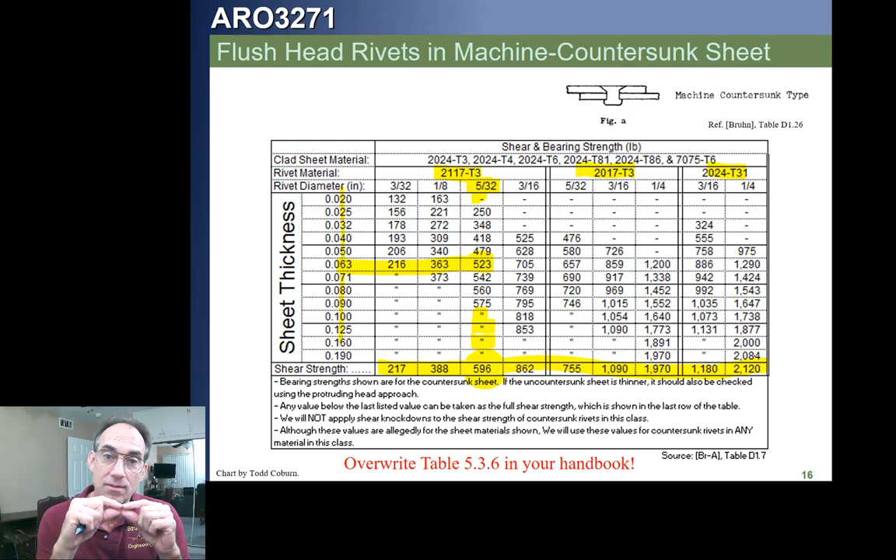If you want to know the shear allowable for this particular rivet, it's right down here in the lower row - this is the shear allowable for these. But if we have thin sheet like 032, it will never get to that full shear strength because it will first fail in bearing - that's what we see in the chart. So this chart is giving us bearing allowables, all of these. What's down here is the shear allowable.

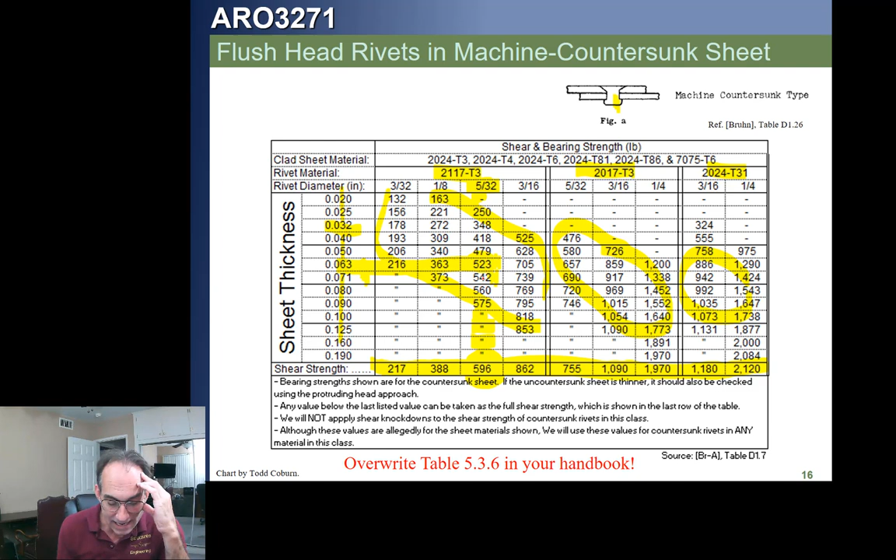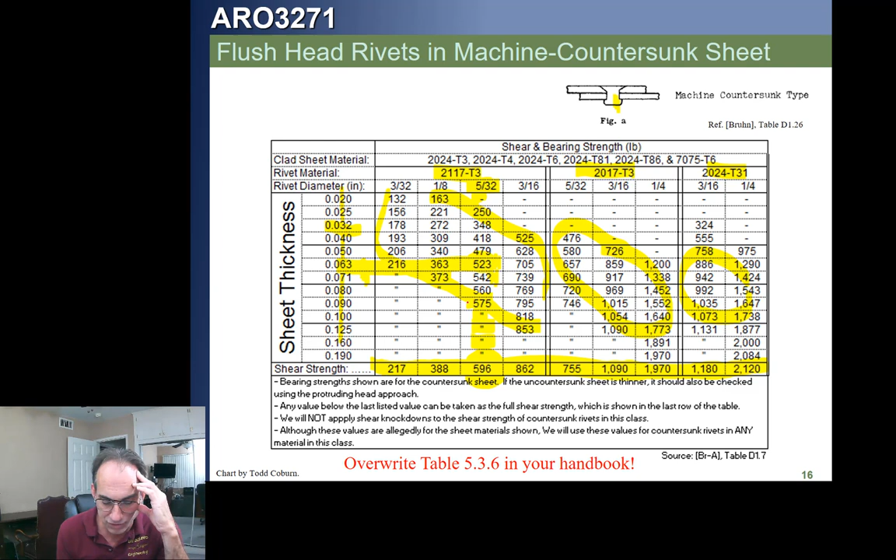Now if we get a sheet thickness between two of these values, like 070, then we'd have to interpolate between the two values provided. If we have a sheet thickness greater than the last entry, we'll just use the shear allowable for anything greater than that. So if we have 090 sheet, we'll use 575 for a 5/32. If we have 091 or greater, we'll use 596. That's the approach we'll use in this class.

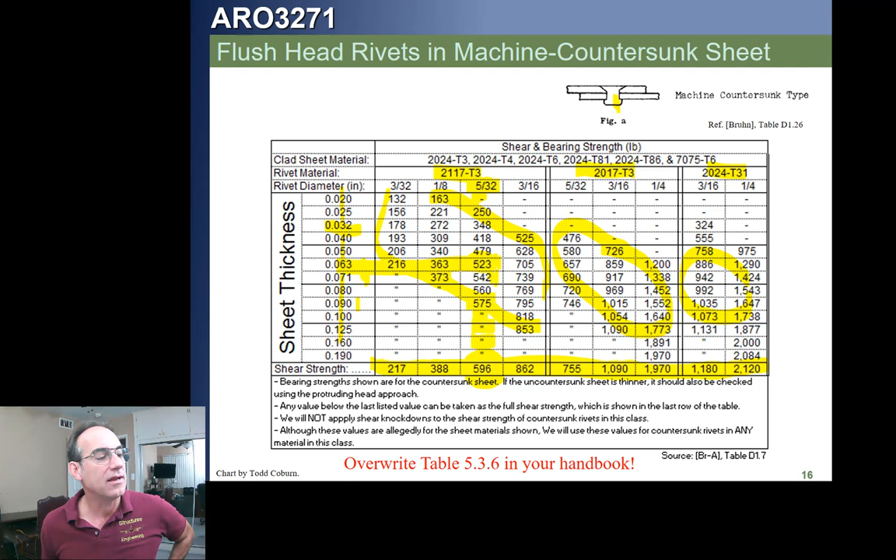Got it? Once again, we may have to combine with axial load if there is axial load. If we have a dimpled rivet, we're going to use this table. This table is like the last one in that you'll see the lowermost row has the shear allowables for these - see these down here?

These are the shear allowables. If you need the shear allowable, that's what it is. We've got 3 types of material again, and for those 3 types, this is the rivet material. Let's say we have a 2117T3, you're going to go and figure out which of these sheet types is most appropriate. This type, then we'll use these columns. This type, we'll use these columns, and so on. That's how this is read.

These are the bearing allowables, and we won't exceed the shear allowable. So anything beyond the last entry will be this lower value, and we're not going to use them for smaller values. That's how we get bearing allowables of dimpled rivets.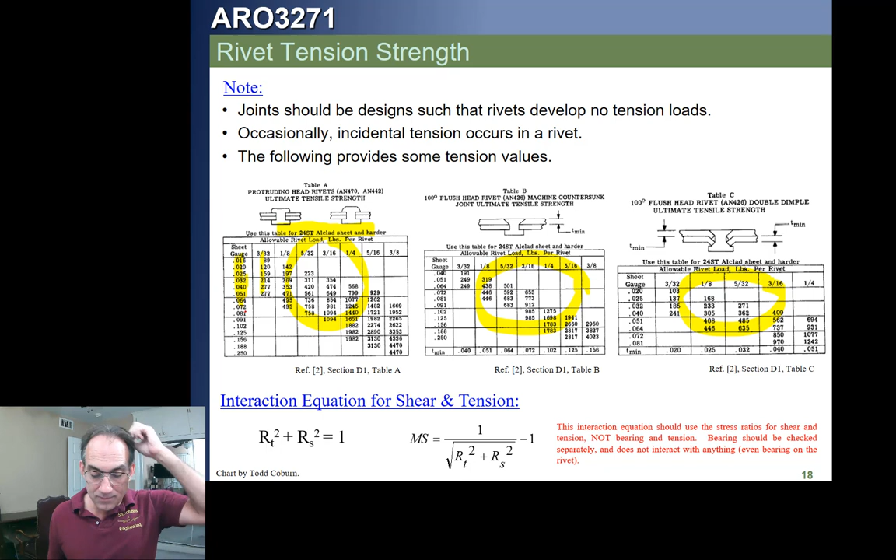So let's say that you have tension on a fastener, and if there's no other loading, all you've got to do is take the tension on the fastener, find the allowable for your fastener, and you can write your margin of safety as simply the allowable tension divided by the applied tension minus 1.

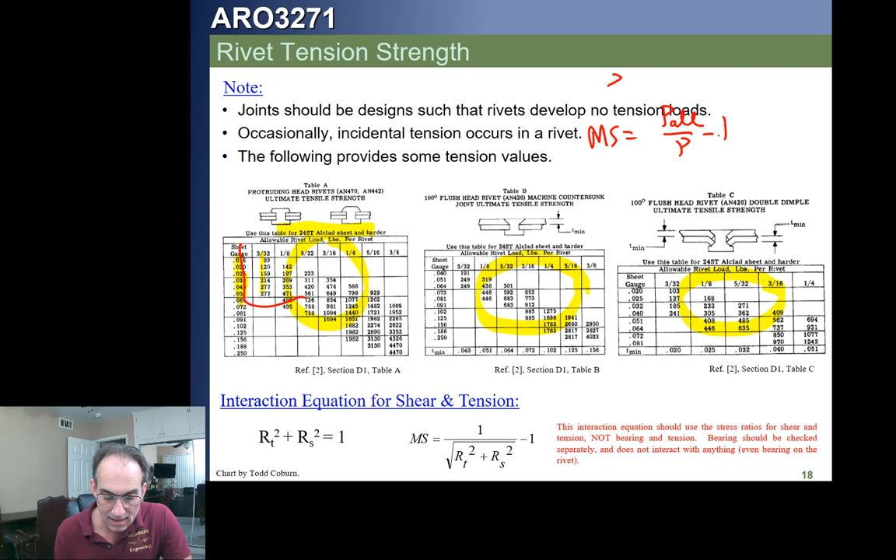However, if you have tension and shear, what you would have to do is first calculate your shear allowable. And we're not talking bearing now, we're talking shear. If you look at your fastener, bearing is applied to the sheet and to the side—it's not interacting on the same surface. If you have shear and tension, those could interact.

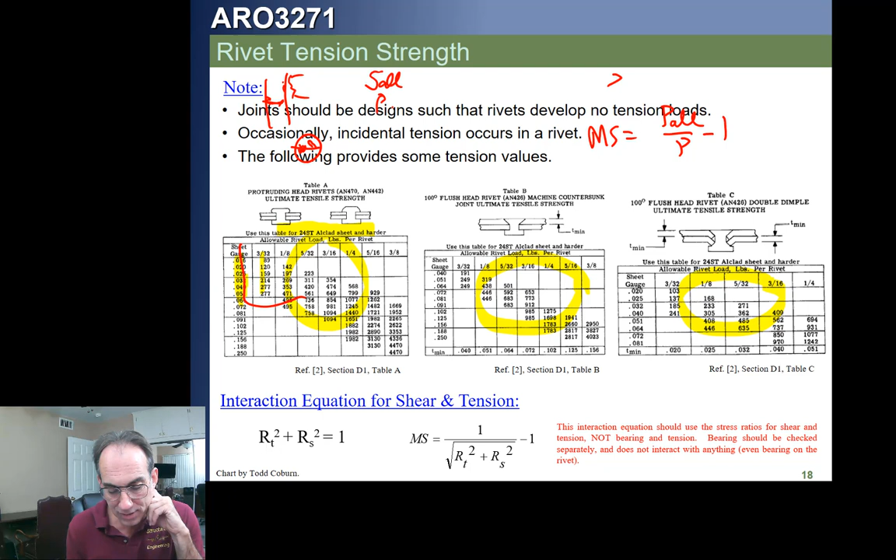So we're only going to combine our shear stress ratio. You're going to get your shear allowable, write your stress ratio for shear. You then get your tension allowable, write your stress ratio for tension. You then take your tension stress ratio and your shear stress ratio and plug them into this equation. Now you'll notice we don't have to use an interaction curve, because our interaction equation has a closed form margin of safety.

So if we have tension alone, we can write our margin of safety directly. If we have tension and shear, we need to first calculate the shear allowable, then calculate the tension allowable, then combine those two, write the two stress ratios, and get our margin of safety from this equation. The same thing is true for machine-countersunk and dimpled rivets—we calculate the shear allowable and the tension.

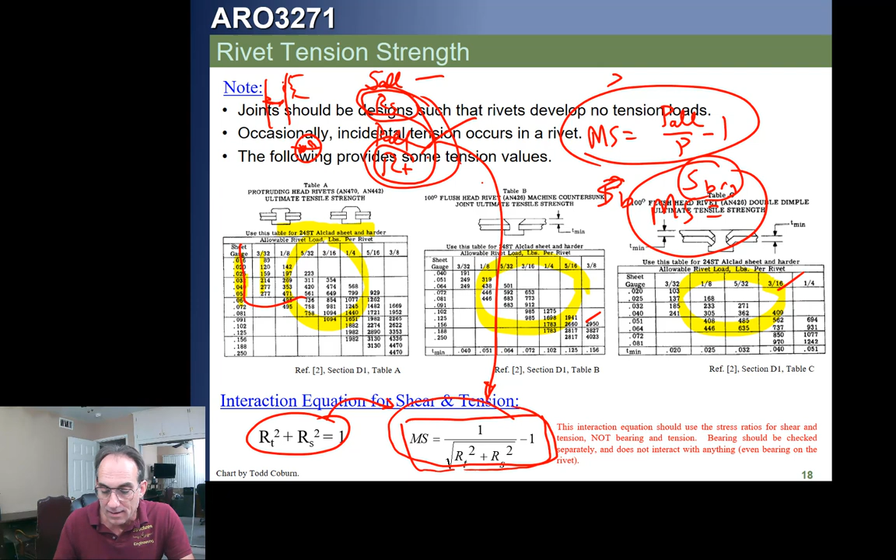Now, we also will need to check our bearing allowable, our shear—SBRG. We're going to need to get our shear allowable also, our bearing allowable. We also need to write a margin of safety against bearing. Bearing might be critical, but probably this interaction of tension and shear will be critical, so we're going to need to check both. Now bearing does not interact—this equation is for tension and shear, not bearing and tension. So we will check our bearing margin of safety, and we will check the interaction of tension and shear.

So our first step, anytime we have tension, is to check: we're going to get a stress ratio for shear, a stress ratio for tension, and a stress ratio for bearing. We can take the shear and tension ratios together and plug into our interaction equation to get our margin of safety, and we can take the bearing one acting alone and write a margin of safety directly. Whichever margin of safety is smaller is the one we will report as the critical margin of safety. Does that make sense?

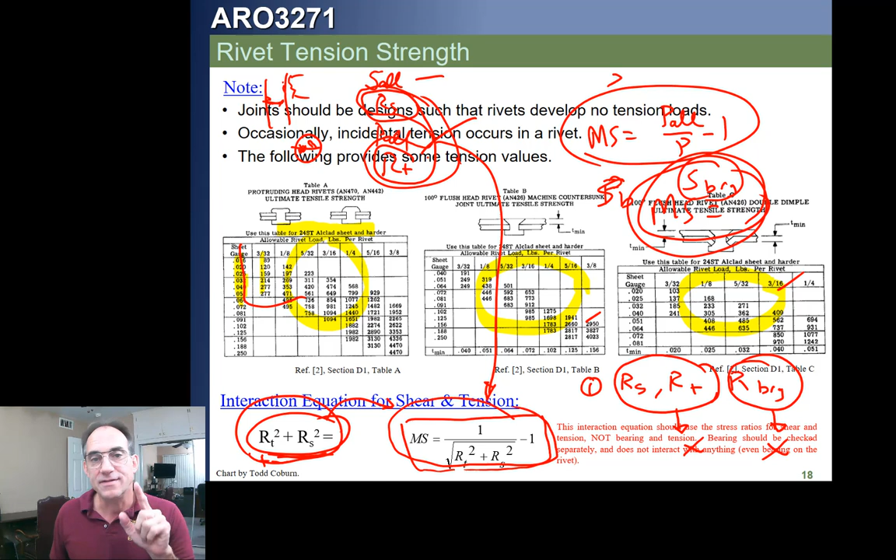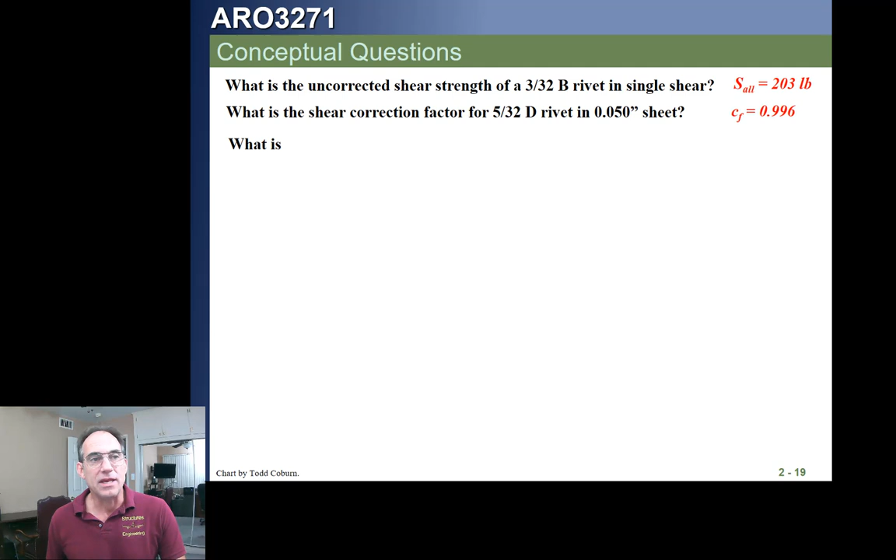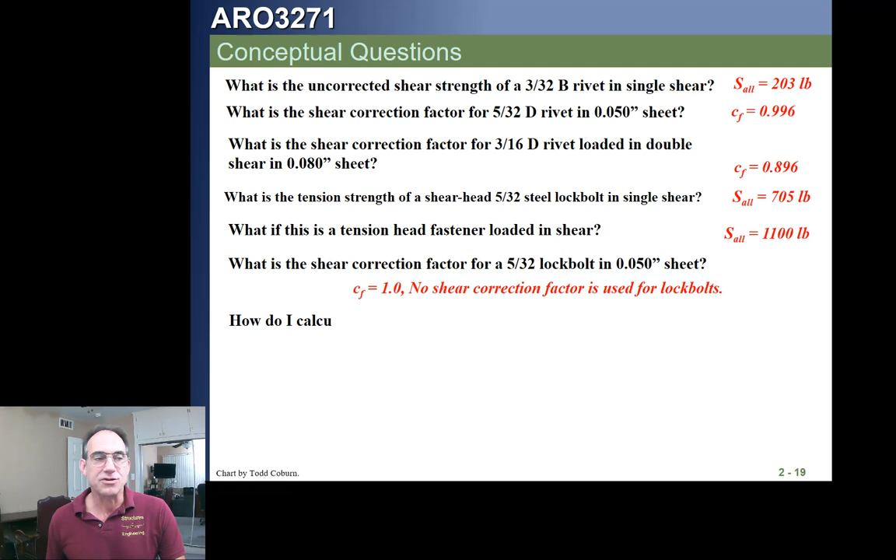This slide gives a number of conceptual questions with their answers. It'll be useful for you to look through each of these and work through them in your handbook. Read the question, look in your handbook for the answer, and then look to see if your answer coincides. This will be very useful for understanding this.